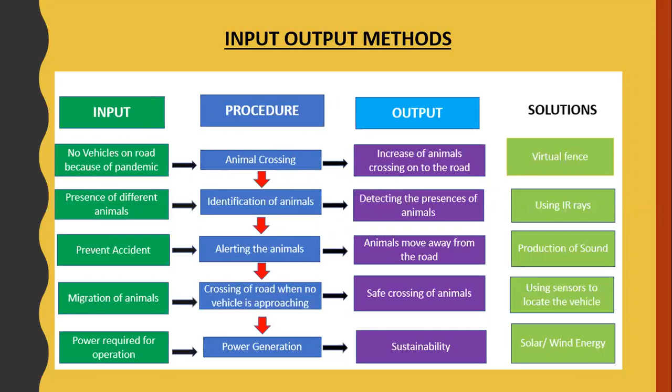The fifth problem is power generation. To make it more sustainable, we are using solar or wind energy. So we got 6 divergent solutions, which are given in the slide.

Number 1 is installing digital automatic brakes for cars. Number 2 is using LED boards. Number 3 is using automatic tranquilizer guns. Number 4 is building an overhead bridge. Number 5 is using an underground tunnel. And number 6 is using a virtual fence.

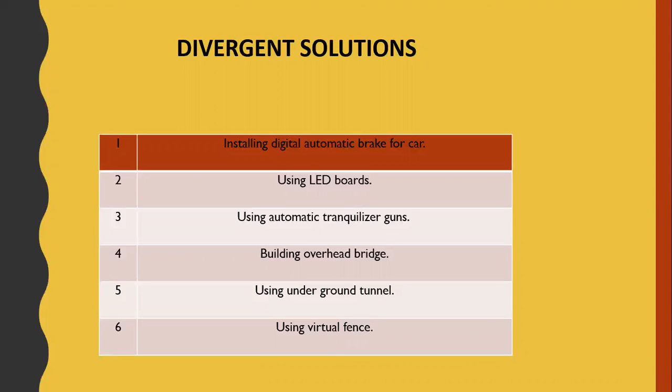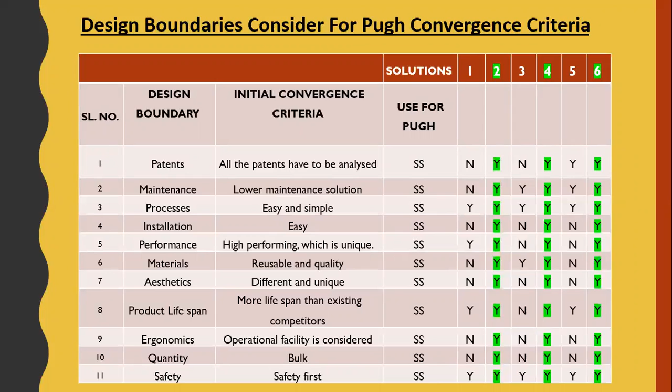So now we will be using design boundaries by considering the Pugh convergence criteria. We got number 2, 4, and 6 as the best solutions from this method. Now we will be doing the first filtration convergent process.

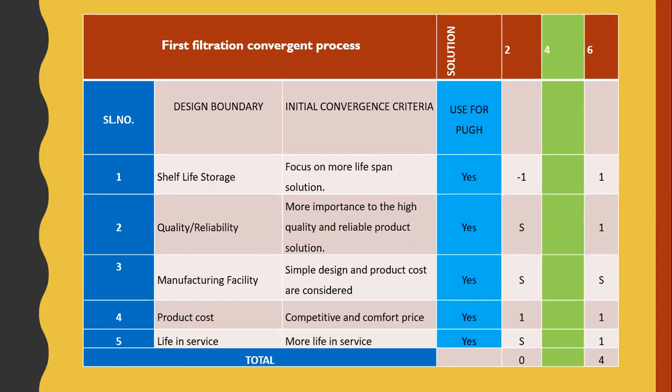Here we will be comparing the 3 best solutions from the previous step. Next is the second filtration convergent process, and then the third filtration convergent process.

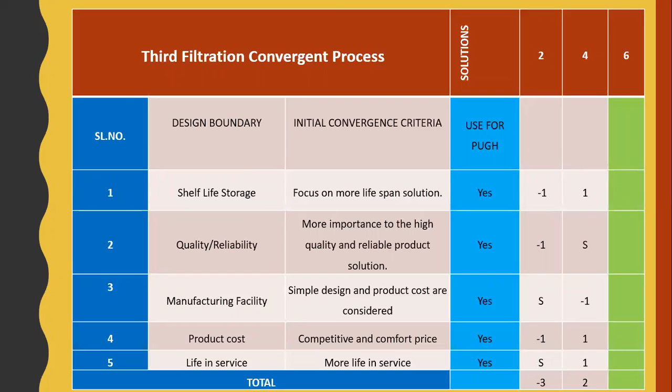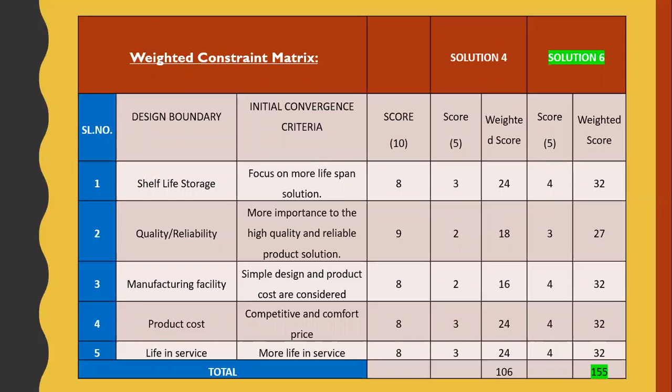We got two solutions from those processes: solution number 4, building an overhead bridge, and using a virtual fence. Now we'll conduct a weighted constraint matrix to get the best solution. By using this method, we got number 6 as the best solution, which is using a virtual fence.

Talking about the conceptual embodiment of the product, since we are using a virtual fence, there is no actual physical barrier preventing animals from crossing from side A to side B. To detect animals, we are using long-range PIR sensors, which can detect animals from 26 feet at an arc angle of 110 degrees.

These sensors only activate when cars are present on the highway. The cars are detected using a speed detector radar, which communicates with a microchip computer inside so that it can signal surrounding fences, activating the PIR sensor signals.

Once activated, if any animals are present, a high frequency sound is emitted from the speaker for a short duration so the animals get scared away, along with high power LED lights, so that the animals don't mistakenly cross the highway even while running away from the sound.

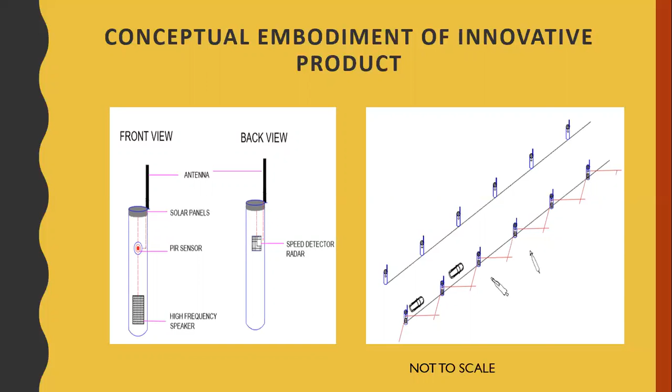Talking about the product design specification, since virtual fences involve detection and communication capabilities, radio communication is a main part of our product, with high detection and computational abilities.

Talking about market identification of this product, products with large range perimeters are currently less common in the market. When we try to introduce this product, I think this kind of product will be much more welcomed.

Talking about physical description, it's about 100 centimeters in height with a 25 centimeter radius hollow cylinder, which can fit various devices.

Talking about financial requirements, most of our financial requirements will totally work on the design and manufacturing of the product.

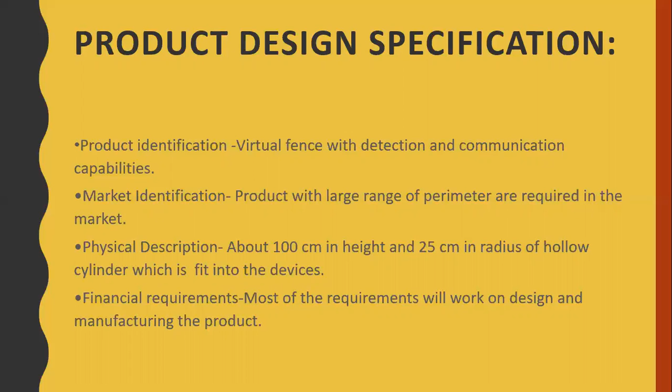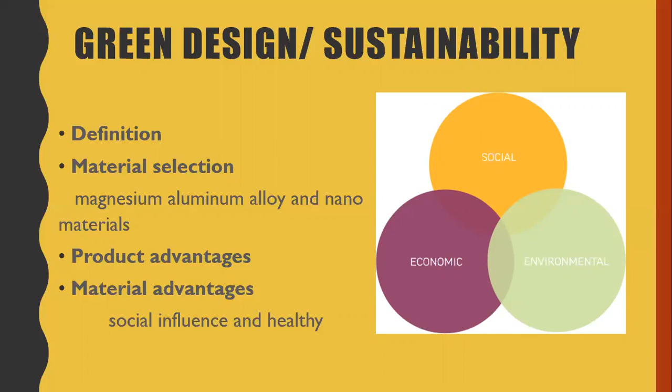Now I'll be talking about intellectual property. There are various products in the market like tracking systems, animal alarms, and GPS control with the same aim, but the methodology is different. In this regard, our product is distinct and innovative.

Going through protection of intellectual property, we are concerned with the distinct design, so the visual appearance of our product secures us patent rights. We have a distinct and reflective logo to establish our trademark in the market, and there is no similar design registered.

Let me conclude our presentation here, followed by references. Thank you all.